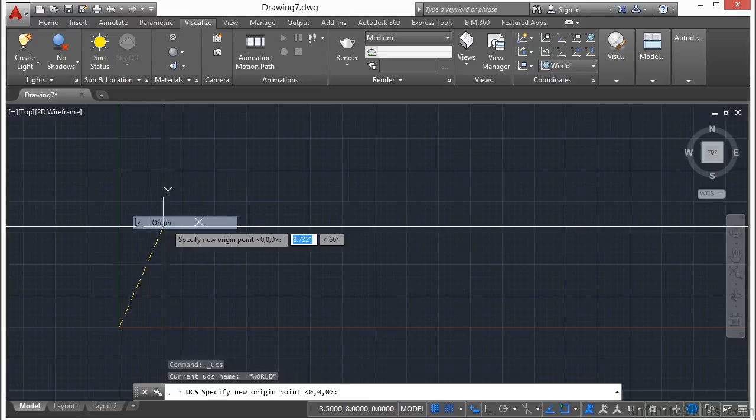You can select that by origin. So you just pick a new point, and there's the UCS. You can see that little box is off in the corner. That tells you this is a customized user coordinate system, not the world coordinate system.

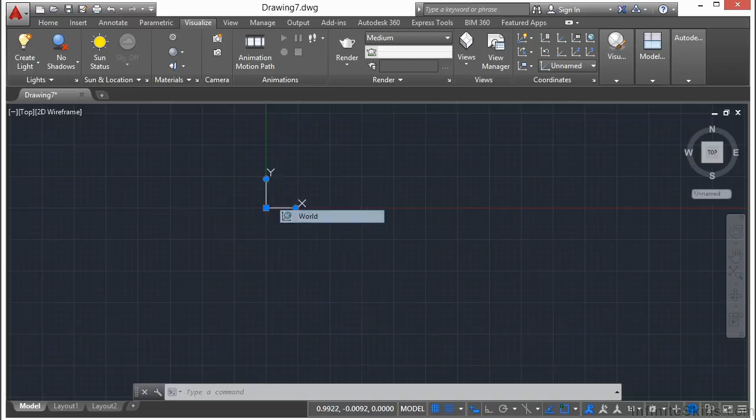So if I select the UCS, I also get some grip options, which we'll talk about later on. But if I right-click on it and click World, that puts me back to my regular world coordinate system.

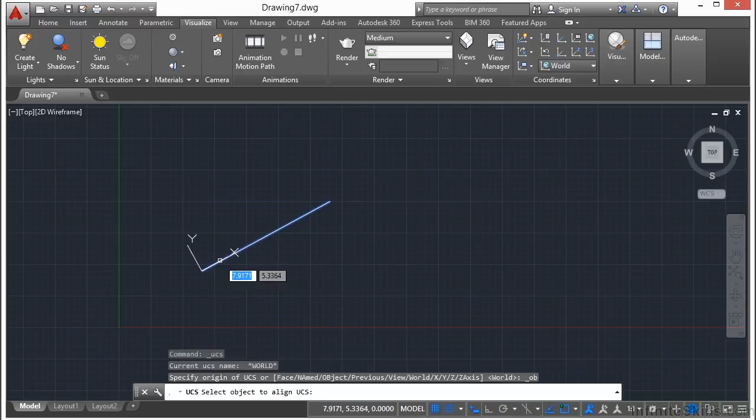So if I have a line or any other object, I'll pick a line, right-click on my UCS icon, and select the Object option. I pick an object, and as you can see, it gives me a little preview. That becomes my new user coordinate system.

So it moves my UCS to a new origin and rotates it to match the angle of the object I selected. So now if I draw a line and turn on my ortho by pressing F8, it locks me into these orthogonal lines, which are normally perfectly horizontal or vertical, but in this case it's matching the horizontal and vertical of my new user coordinate system. This is a great tool for drawing things at specific angles quite easily.

Now, when you work in 3D, the UCS is key. There's a function called the Dynamic UCS feature that will automatically change your UCS to match the face of an object, allowing you to draw on that same plane as the object selected. That's probably one of the most commonly used cases of changing your user coordinate system when working in 3D.

Now, that's getting a little heavy for this course, but it's hard enough to keep track of just 2 axes, much less 3, 4, or 5 different coordinate systems you might want to use. So we're going to try to keep it simple for you in this introduction. You can create your new UCS from scratch by picking a couple of different points, or you can even select the icon and just rotate or move it.

Of course, my ortho is on, so I'm going to turn that off. As you can see, it's quite simple to rotate the UCS that way. You can grip edit it to move it to a new place or make slight rotations, whatever you need to do. Now, after you create a new UCS, you might want to save it, in case you want to use it or go back to it later. So create the UCS like we've described, using any of these methods.

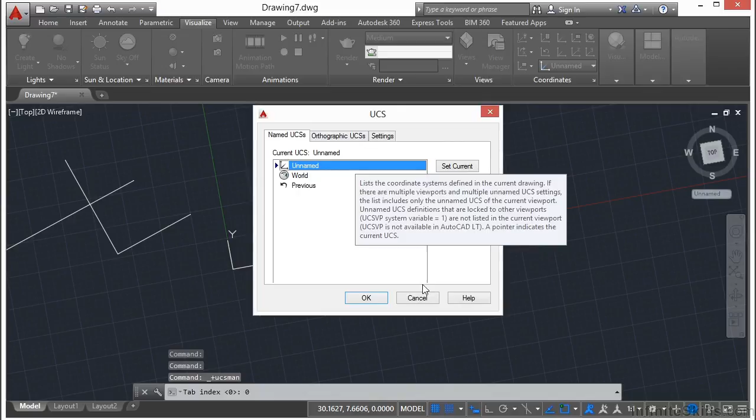Now, if you come up to the Visualize tab, you see unnamed, world, top, bottom, etc. I can click on this little button, the flyout, and this will get me to my UCS Manager. I can get to it that way, which is a real easy way to manage it, or I can come up here to my UCS named UCS option. I can select that, gets me back to the same place. And if I go to my UCS icon, right click on it and click on the named UCS option.

So when I come here, it tells me I have two different options. Essentially, I can go back to world coordinate system. If I select it and hit the set current option, then that's where it will take me. It'll set this selected UCS as my current UCS. Now I can select the previous one, and that will take me back to whatever UCS I was using right before the current one. Now this is the current one and it's unnamed.

If I select inside this box, once I pick it again, I can give it a name. I'm just going to call it Custom 1, press Return. Set current, and it's current. I click OK, and I have it saved in here now whenever I want to use it.

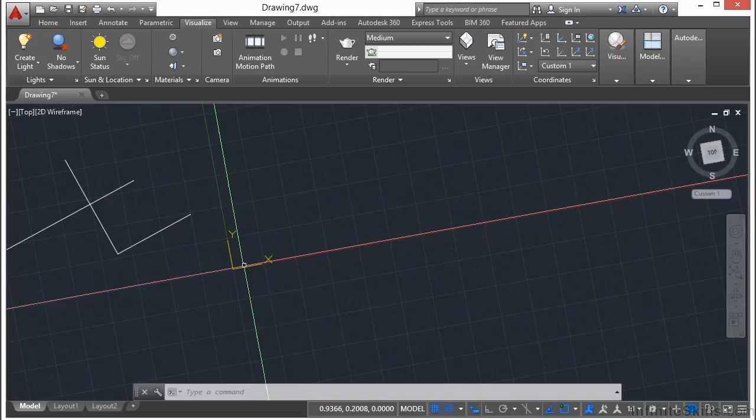So let's say I go back to my world coordinate system. If you note here, I'll open up my UCS Manager, go to my named UCS. I have the Custom 1 as a possibility. I select it to highlight it and then hit Set Current. Click OK, and it brings me right back to where I was. So if you go to the trouble of creating a custom user coordinate system, then you really need to save that in case you need to go back and continue working where you were before.

So that's one trick that you can use to help you work in a different coordinate system and to manage that as well. Using a rotated UCS is great for isometric drawings, as you could probably see. But AutoCAD does have a specific mode for that called isometric mode. This allows you to toggle your rotation very quickly, and it's actually quicker and easier to use than UCS.

Let's open up our drafting settings dialog box by right-clicking the snap icon in the status bar. So you come down here, right-click on it, go to snap settings. Go to the snap type option and click on isometric snap. That's what you're going to want to do. You want to turn that on. That will turn on isometric mode, and click OK.

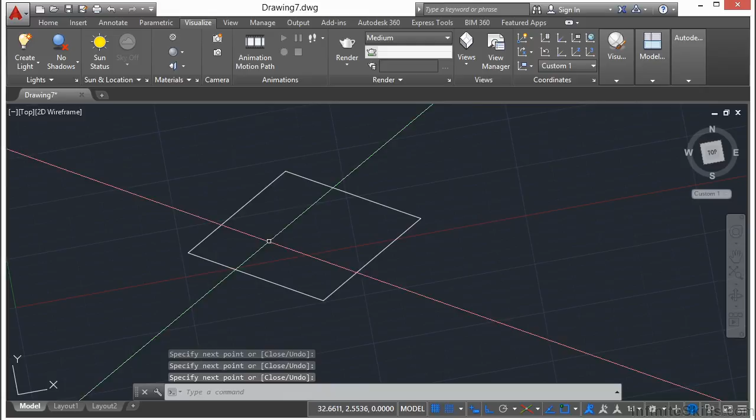So now you see here, you have a sort of skewed, diamond shaped set of crosshairs. So let's start drawing. If I draw here and turn on F8, this will lock me into isometric mode so that I can now draw a 3D isometric set of line work. So I can draw an isometric view of a cube.

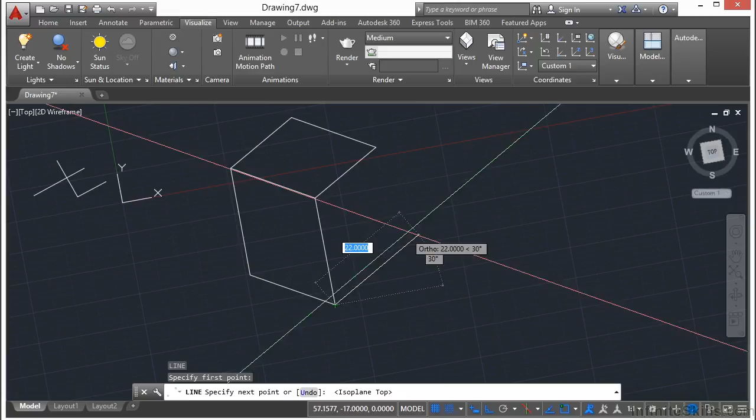So I can come down here and press F5 to toggle through my different isometric planes. And you can see as I toggle through them, my axes change. By very quickly pressing the F5 button, I can very easily draw whatever it is I need to draw. It looks like I've drawn a 3D box, though I've never left my 2 dimensions.

Whereas drawing with UCS can make isometric easy, it can, but it's in one plane only, so you have to keep changing your UCS to get that special look that you need. You can also use the isometric settings, just by right-clicking on the snap settings, click the snap settings button, and make sure the snap type is turned to isometric to do that special view. Press the F5 button to toggle through, or click here on the status bar to toggle through the different isometrics, tops, and other views that you want.

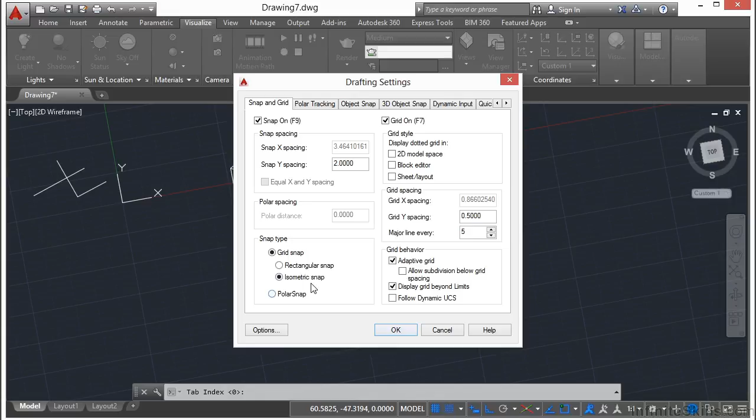And when you're finished, make sure you turn this back. And there you go. So you can see how a UCS that you've customized can really help you out in making specialized drawings.